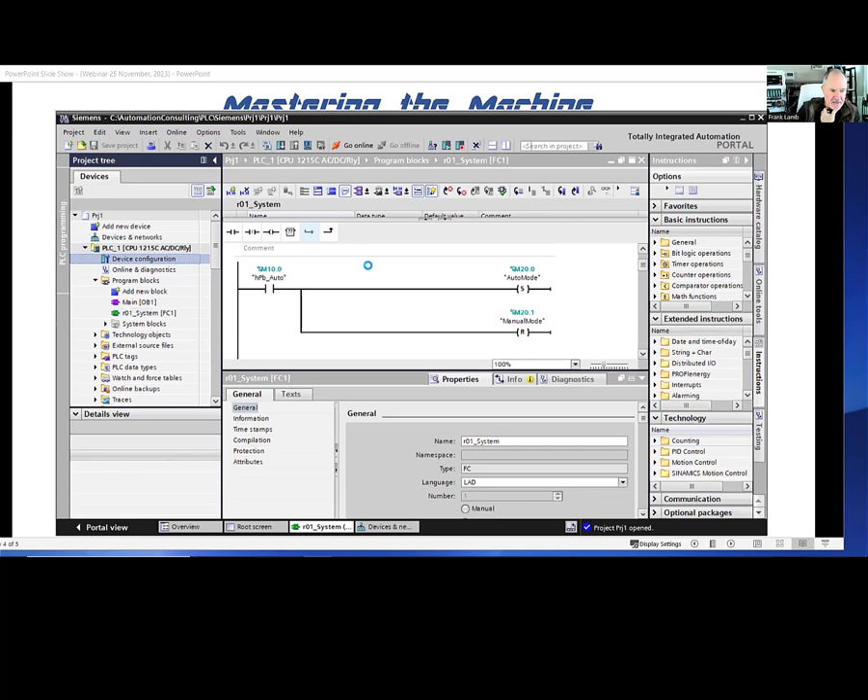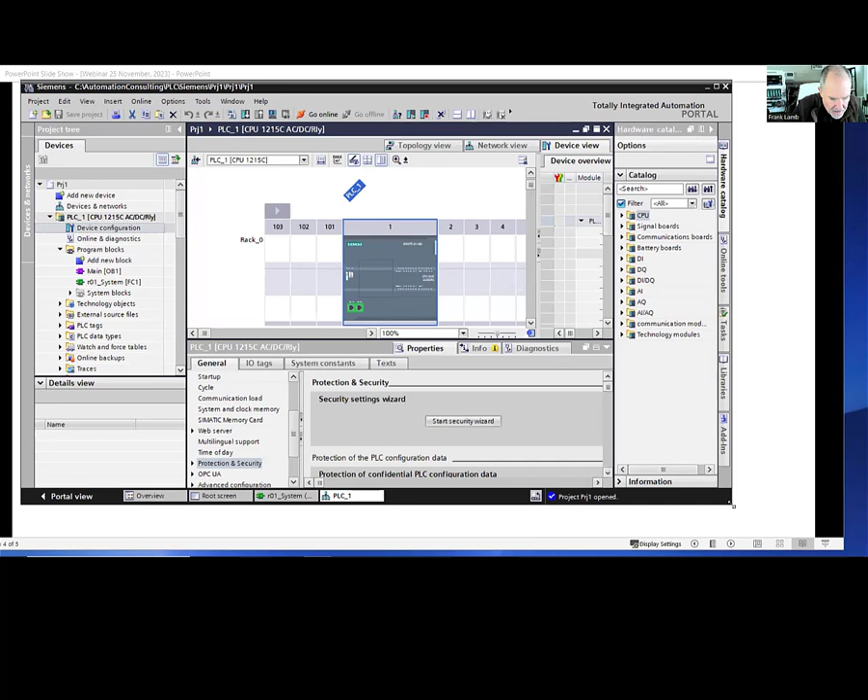So here is the unit itself, and this is where you can look over to the right and see what's on the module itself. You see all the room for the cards and things like that. We'll drag this and make it a little bigger. You can see all the space for extra cards here to the right, and then special modules here to the left, things like communication modules. There's this little port on the front. I've already explained a lot of this before, so as far as configuration and setup, that's just a look at it.

When you open this up on the right, you will see it says digital input 14 and digital output 10, so it has 14 inputs and 10 outputs. They are on channels 0 and 1, so your addresses are I0.0 through Q1.6, I guess, and then the outputs would be Q0.0 through Q1.2.

That's kind of how the numbering system works, and I've covered this before. You can see analog input 2, analog output 2. The channels are here, 64, so this is Word 64 and Word 66 on the inputs, Word 64, Word 66 on the outputs.

So for $638, you get quite a bit of I/O. And then you also get these high-speed counters as inputs, and pulse outputs, so you can do pulse width modulation. It does have some new features. It mentions, I believe, MQTT, so it has that capability.

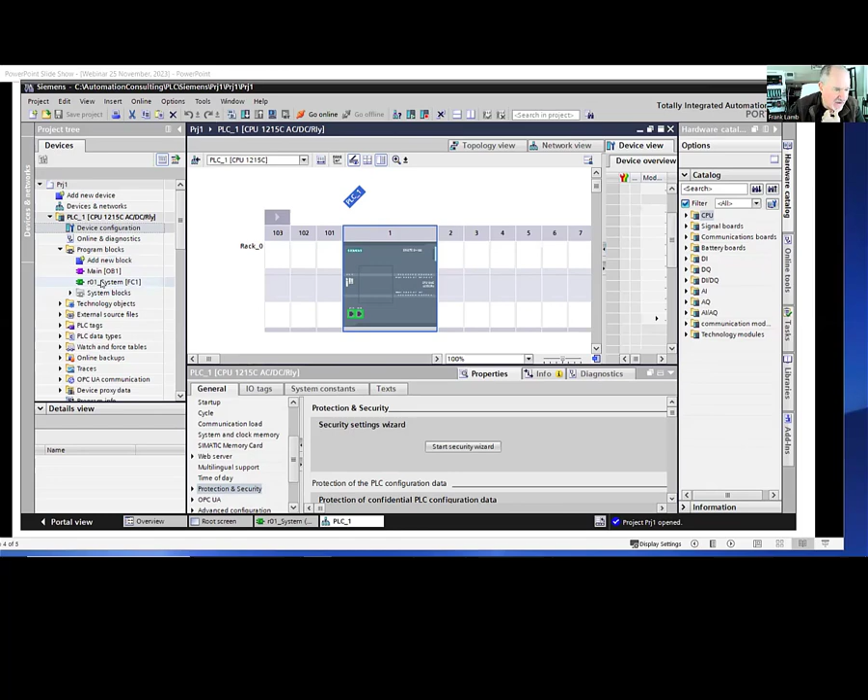But what I did is the typical system routine that I normally do. You can simulate this. I'll put this into sim mode here in a minute, and do the typical auto manual mode that I do in most of my videos.

You can see here the logic is hit the push button for auto, and it latches you into auto mode. Push the push button for manual, and it'll flip you from auto back into manual as long as you're not already in auto cycle.

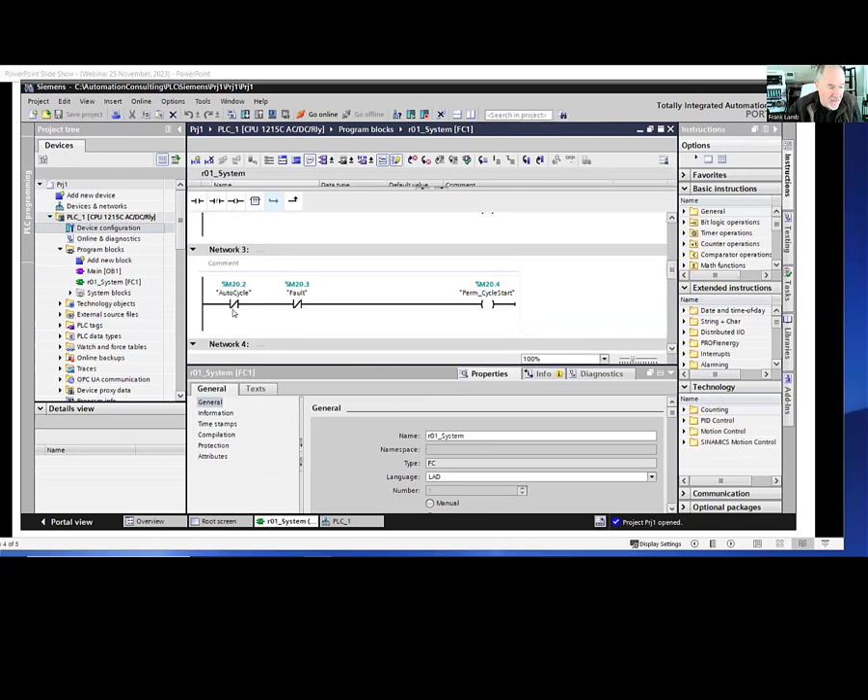And down here, you can see I've kind of got a new template here. I create a separate permissive. It's just a little easier for cycle start, and part of that is the fact that you're not in auto cycle already.

If you're in auto cycle, you can't press this button and do this cycle start. So you have to be in auto mode, and you have to have this permissive, which includes not being in auto cycle, and then you would be in auto cycle.

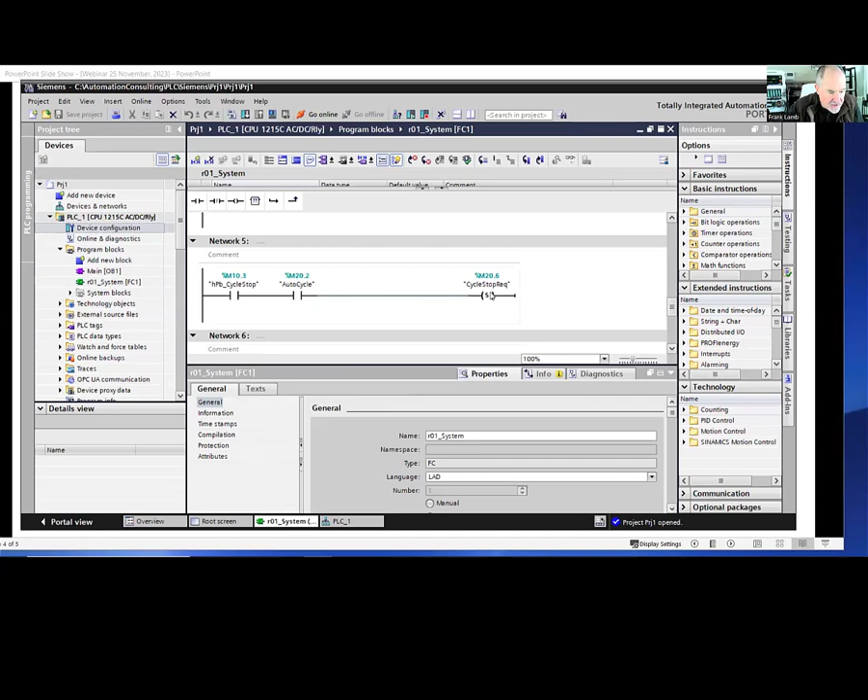Once that happens, you can no longer press this and go back into auto cycle. There is a cycle stop request for auto cycle, and once you get your permissive for cycle stop, then you will stop being in auto cycle. So that's the basics behind it.

One of the things I did want to show here is what it is like to start a new project. Because when you do that, and we'll go ahead, let's see, this was called Project 1. We'll call this Project Webinar, and I'll even put the date on it. Go ahead and create this.

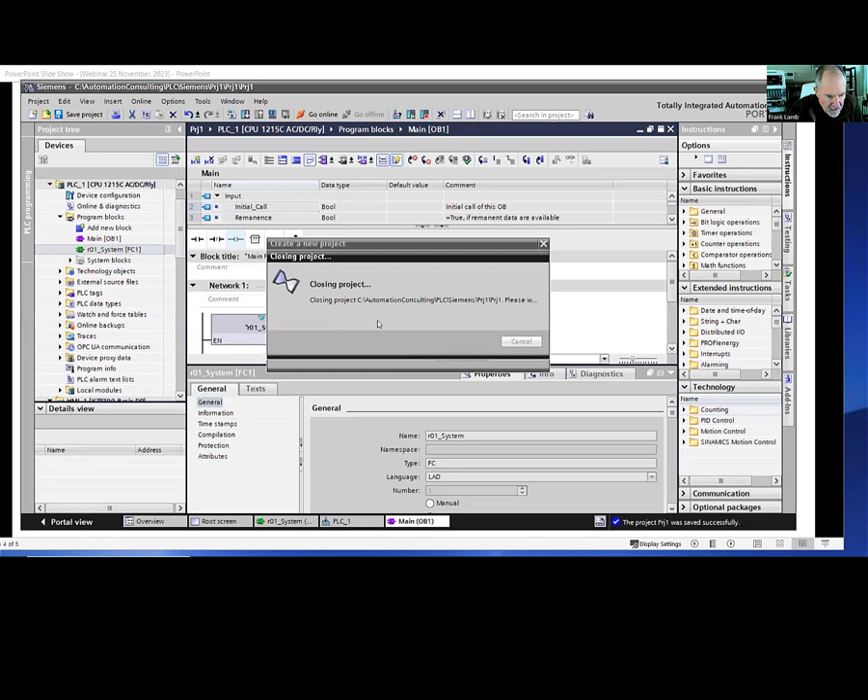Do I want to save the changes? Sure, yeah, I added the call and some other things, modified the Ethernet port and all that good stuff. So if I do another webinar on this, I'll have the simulator installed, or I'll use the real PLC, which is more likely actually. I do want to build this into a trainer.

So here is what you get when you start a new project. You basically have no hardware, no nothing, add new device, and this is where you choose your parts and that sort of thing. And I'm going to start this with the same thing.

Notice that I'm on the HMI by default, so I wouldn't want to do that. You do have PC systems here also. I could just use a PC, or I can go into the controllers.

And this software, for what was it, $400 and some dollars, what you get is you get a basic HMI. You can do the basic level, comfort I think is what it is, the most basic HMI level, basic panels. That's these. You do not get the comfort panels, so you could pick one of these, and then you only get 1200s.

So I can't configure these, right, 1500s. This $400 and some dollar software package is only for the 1200. So I purposely bought something inexpensive so that I could kind of get started with version 18. I already have, like I said, version 15 with 1500s and all that through automation training, but this was an attempt to take a look at the new software.

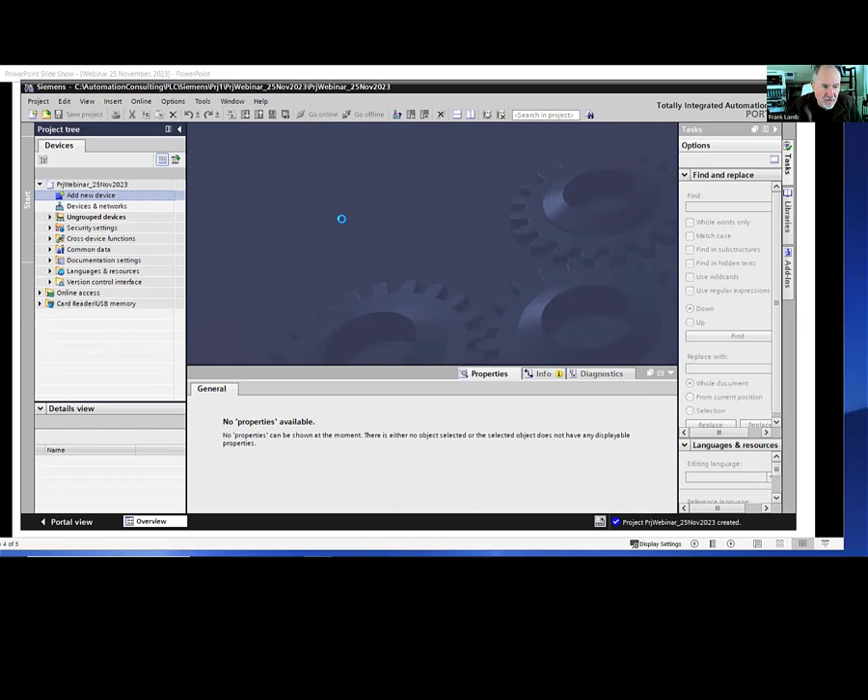You see it humming a little bit here. It takes a little longer to do the configuration, as I mentioned, than version 15 did. I've been through everything from version 12 all the way up through version 15 previously.

This is what popped up the first time. There's a lot more to the configuration than was on version 15. The only thing I needed to do is go down into security and set it up before, press setup to set the password. So I don't want to do that. I want to keep this thing open. This is just a trainer.

Security is becoming a really big deal now on all PLCs. For training, it might be good to set that up so you can teach people how to set the security up. But I don't want to have to track down a password every time I go online with this as a trainer, so I kind of leave all this open.

It says here, protects the PLC configuration from the TIA portal and the PLC. So I go ahead and set this off - do not protect the PLC configuration data. Move on to the next. It says only secure PG/PC communication allowed. I do not want that either, so we can just do legacy communication.

We'll see if this opens the simulator. Actually, I don't think I've installed the simulator like it looks like. So finish - there we go. I'm kind of back where I was previously. This is where you go ahead and start this up, and you can configure your ports and all the typical things that you would do.

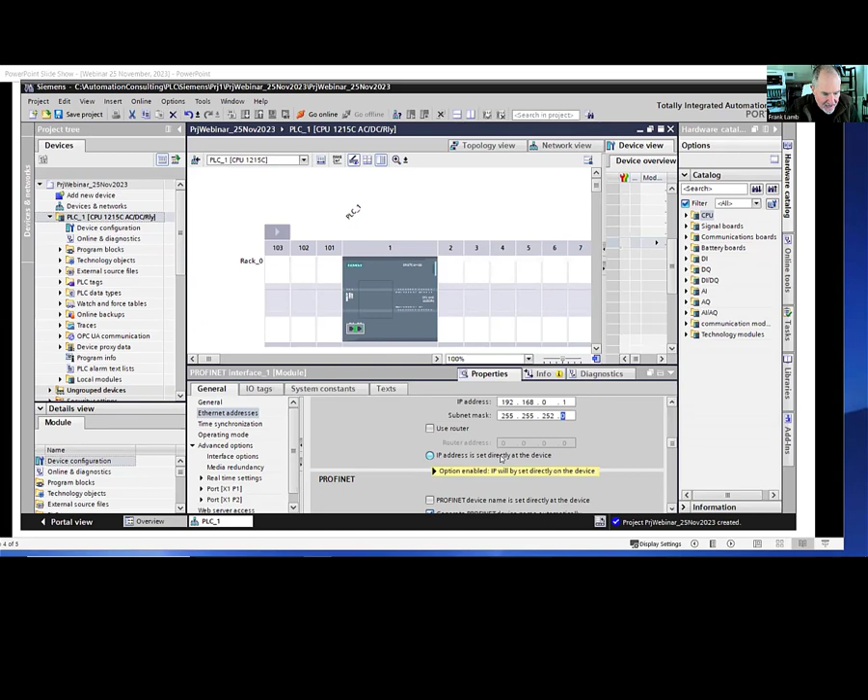If you were to use a router, you would need to set the address of the router and the address of the PLC. And of course, you can also set the IP address directly at the device - you can go over there and bring up a little pop-up screen and set it there, and set up a Profinet device name.

This is all a big tricky thing. We can talk about that a little bit later, maybe on a different webinar. This is in my trainings - I do have videos on setting all this up in the Automation Academy. So for people that are members, they've probably been through the TIA Portal configuration.

But anyway, that is basically what it's like to create a new project. And notice that it immediately comes up with a whole lot of security things that it didn't come up with in version 15. That was the biggest change I noticed going from 15 to 18. If I had a version 15 PLC, I would need to upgrade the firmware to version 18, and then probably if I built a new project, I'd be going through all those steps again.

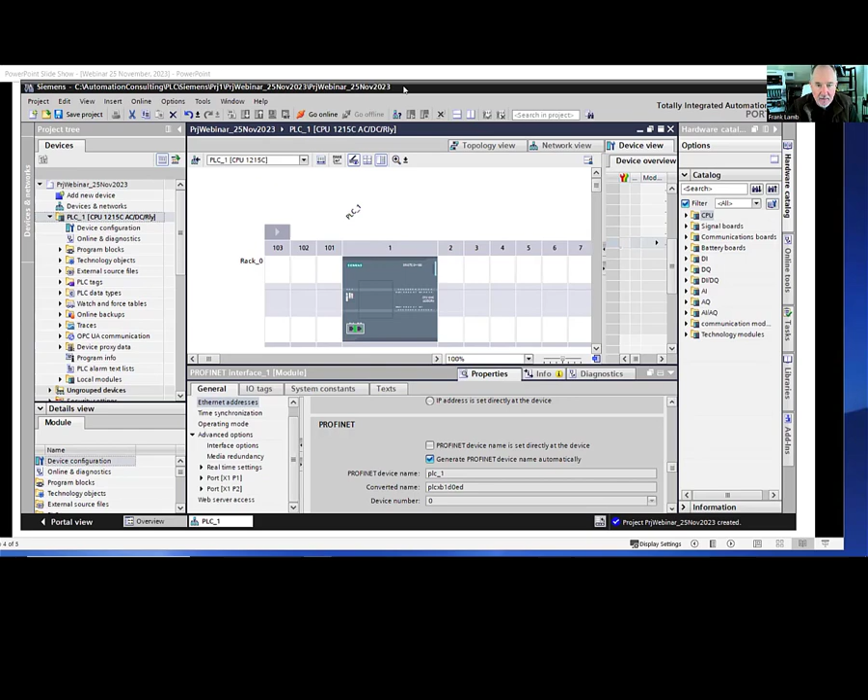So that's a look at the TIA Portal software that I just bought. Like I said, $438 - this is the 1200 compatible software. I do need to go back and install PLC Sim, I think it's part of the package that I have. I hope I don't have lots more trouble.

This whole side-by-side configuration - every time software gets more advanced, and you've probably seen this with Allen Bradley, it gets heavier. Every version that comes out, I'm on version 33 now of Allen Bradley, and the software is just heavy and slow. Every time they come out with new versions, it gets heavier, slower, more difficult to install. I notice at Automation NTH they've had to install Allen Bradley software on a variety of computers, and it's always a multi-step process. So that's my complaint about most of these software companies.

From my perspective, the software programming ability for the old Allen Bradley version, I'd say version 24 and around that era, is about the same as version 33. The only thing they've done is get new hardware compatibility - they've got the L80 processors and things you can go online with. But if you're using an L73, the software is just lighter and less complicated, and in my opinion, just as good, if not better. The letters are bigger on the screen.